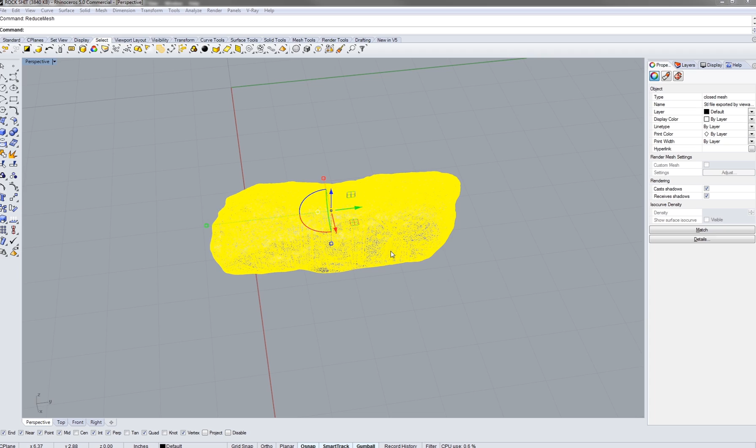Hi everyone. In this tutorial, we're going to learn how to unroll surfaces using our scan rock. You can also do this with the rock that you generated through using the jig at the beginning with the faceted method.

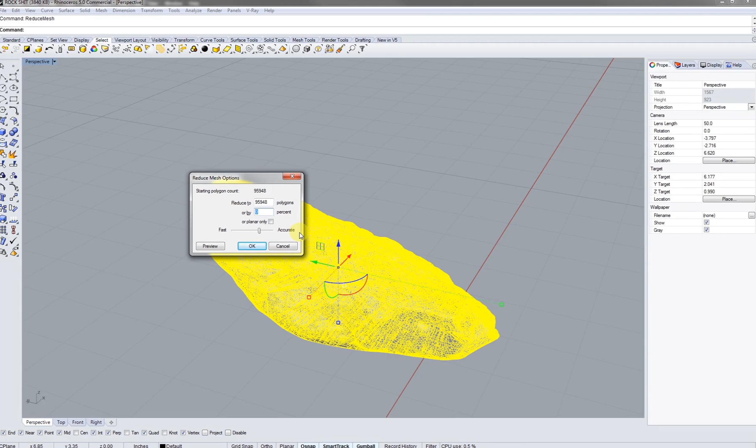But what we can do with our scan rock is literally reduce it using reduce mesh down to the point where we get maybe 100 different faces or a little bit more. So I have about 100,000 faces on here. I'm going to eyeball this a little bit and take it down 75%. We'll see where that takes us.

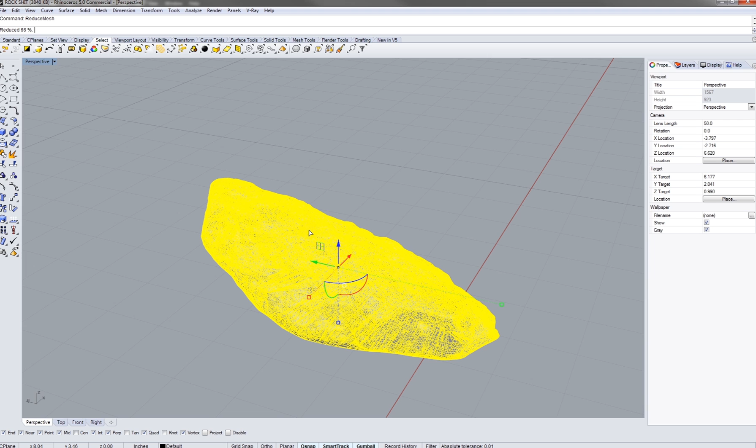Basically we're looking for triangulated meshes, and we don't want any overlaps within this little tutorial. It looks like it's still thinking a little bit. Almost there.

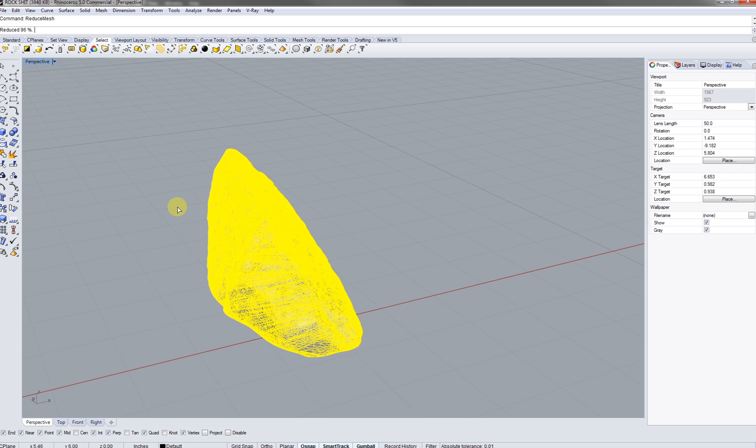There we go. So this is still a lot of faces, so let's do it again. Let's bring up the number. We're at 23,000, so let's bring it up to 90. Otherwise we'll be sitting here all day trying to eyeball it.

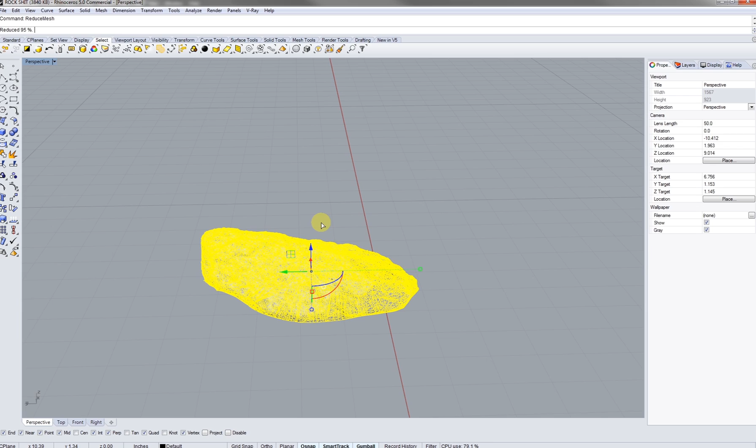There we go. All right, this is still quite a bit of faces, but we're not going to go 90 again. So let's just bring it down 25%, see what that gets us. And we're going to bring it down even more. Let's do 50 again.

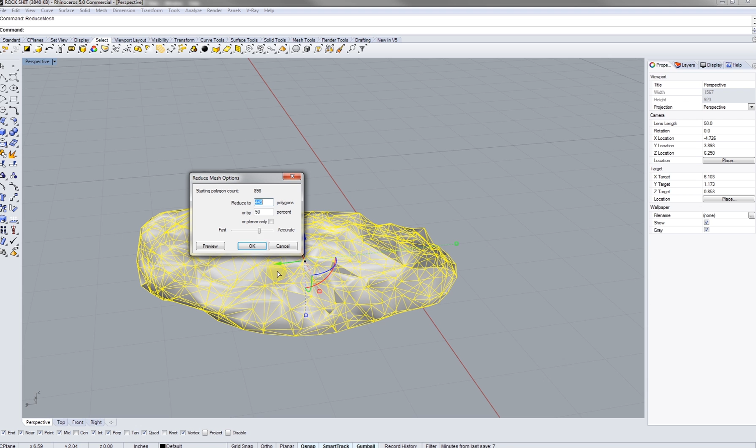We want faces that are about half an inch to maybe an inch long. So these are getting pretty wicked. Let's do it one more time. There we go. This looks pretty good.

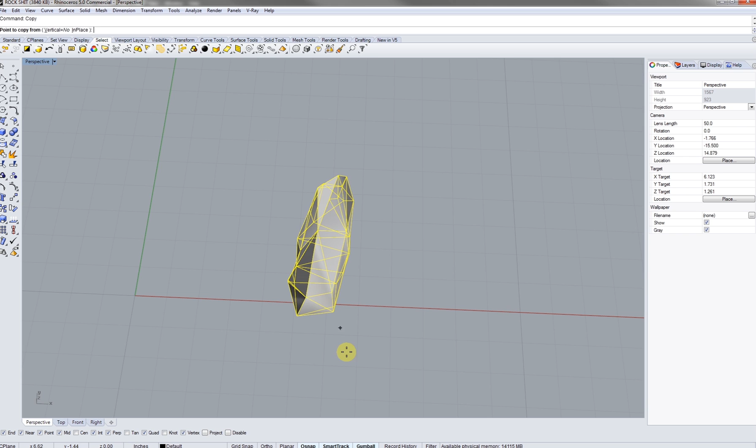So for this exercise, basically we're going to copy this over. Let's just copy, and then let's go back one. And let's paste. Let's try to collect our history here a little bit. You guys should keep basically moving your stuff over as you go.

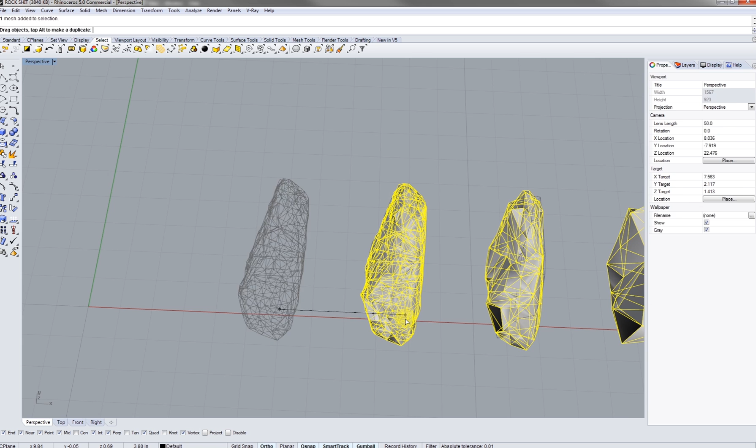That's still a lot, so there we go. We can kind of see a de-resolution pattern through here. So for this one, let's see if we can actually get a little bit better looking rock than this one. I took it down 50 again the last time.

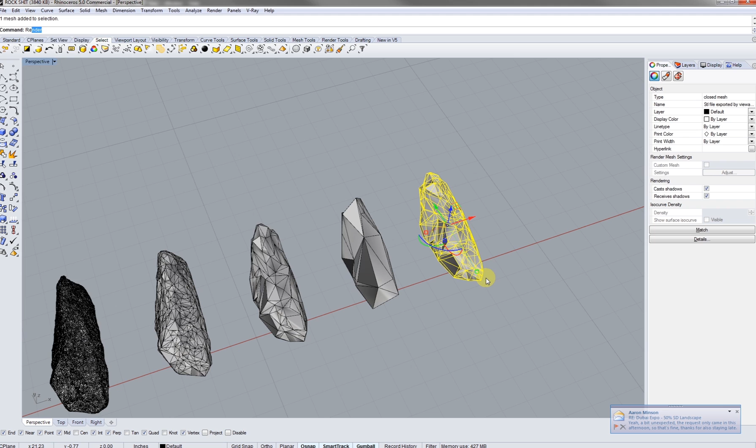So let's bring it down. Let's just do 25 for now and see where that takes us. Do it again. Do it one more time. One more. Okay, that's about the same.

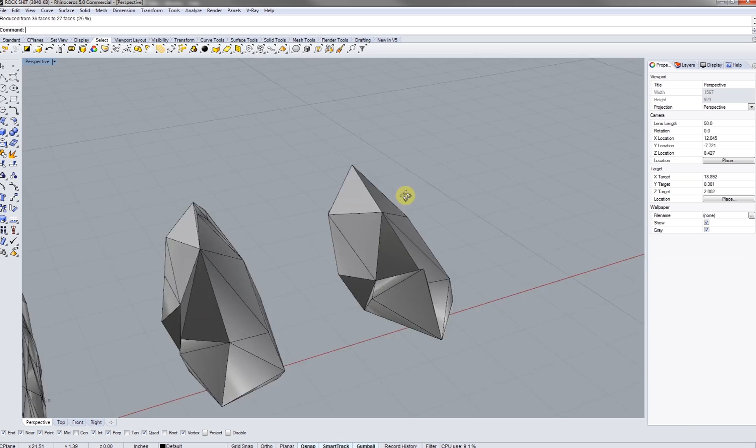Okay, this is looking slightly better. Let's try it one more time. Perfect. So we're going to end up using this rock over this one. It just seems like the faces are actually lining up a little bit better.

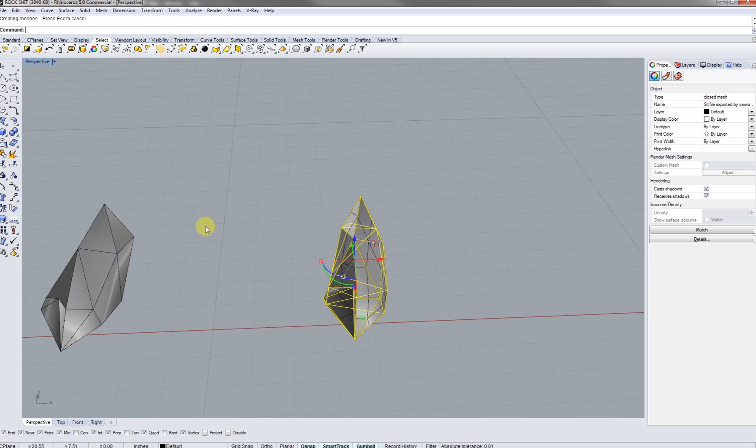So the next step after this is, since we still have a mesh, we're just going to move that rock over, and we're going to right click on our mesh, from surface, and that'll give us polysurface from mesh. Basically from here, we're going to unroll the surface to make cut sheets. So using this, let's just explode it out.

With this technique, you want to select surfaces that kind of run in a line. So if this is similar to a ribbon that's constructing this rock, select them all together and join them. Typically what I'll do is just change the color, just like that.

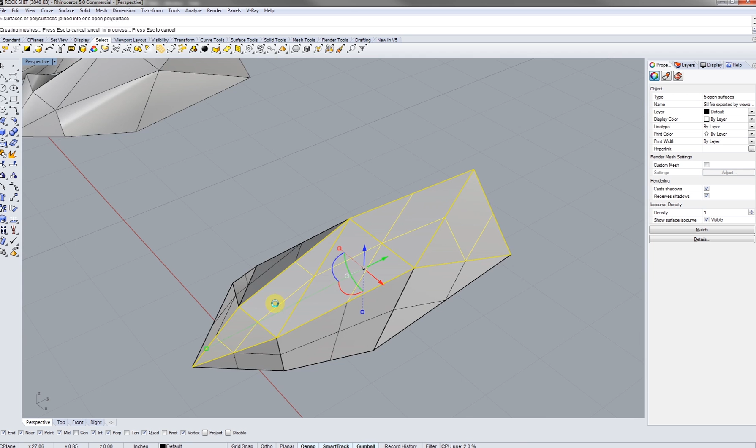So the next one right below it, I'd say that's just perfect for a line, and I'll join those together. Now we might have to change these a little bit later, but for the most part we can try to eyeball how these pieces kind of fit together in these little ribbon segments that form together.

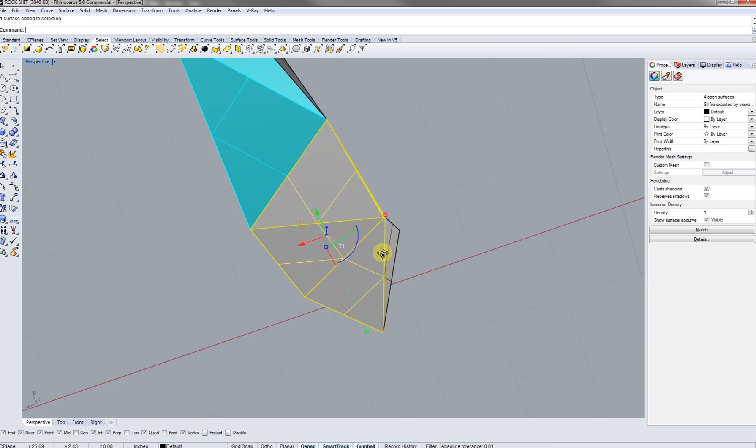This one might be tricky, so let's take off those three. Let's just join these guys. They don't specifically need to be all different colors, it's just as long as you've got them joined.

So this one, since there's that little kink in there, I'm going to just join these to make it simple, and then I can see that these more than likely will work. Let's join those, and then around this bend.

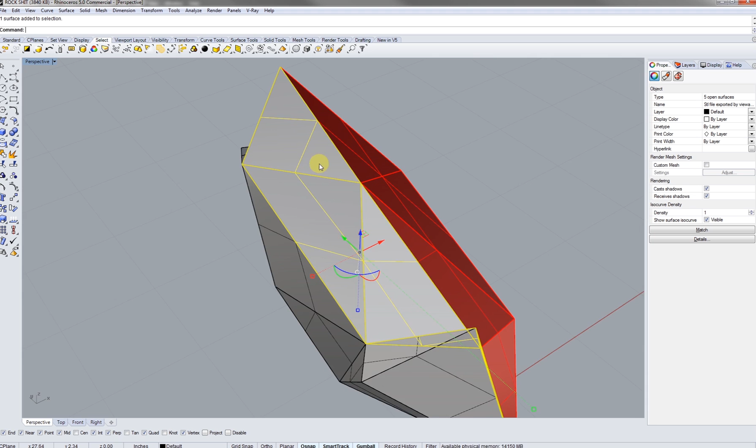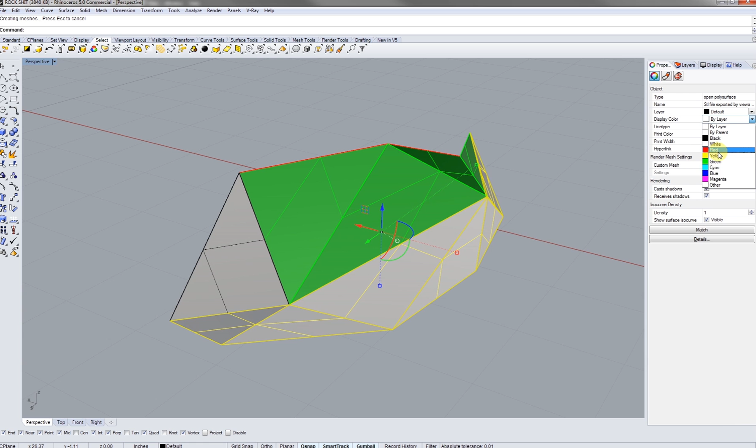You're basically, when you're trying to find these ribbons, you're trying to find continuity within the model. So these ribbons here, or these segments, are helping construct the rock, and these two can go together, just using polysurfaces. So being able to break down the logic behind how these surfaces are created would be a big advancement on fabricating this rock.

So near the end, you should have something similar to this. And I hope we have a couple mistakes so we can see how to redo this a little teeny bit.

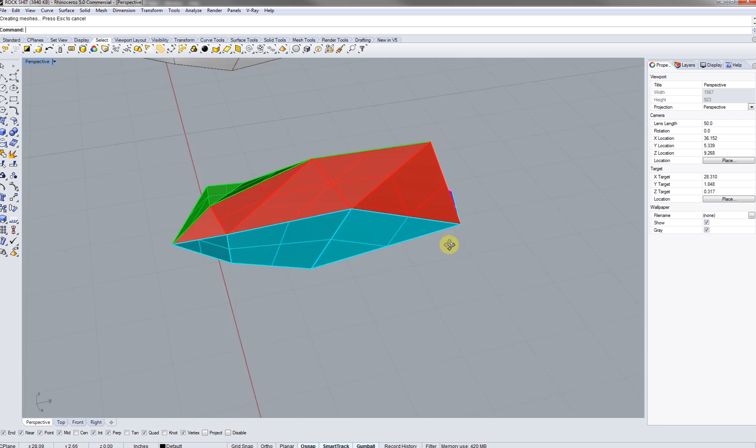So the next command we're going to use is unroll surface. You're going to get some options up here. Basically, what I typically do is explode — I say no, because otherwise it's going to break it up into triangles that you then have to piece together. Labels help keep track of everything, but typically I don't use it.

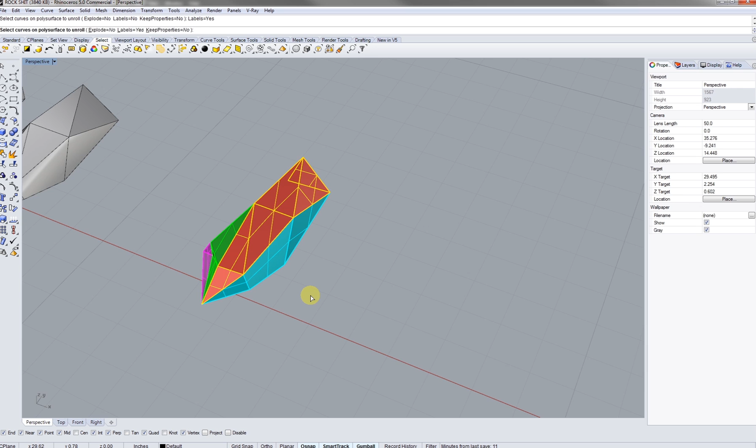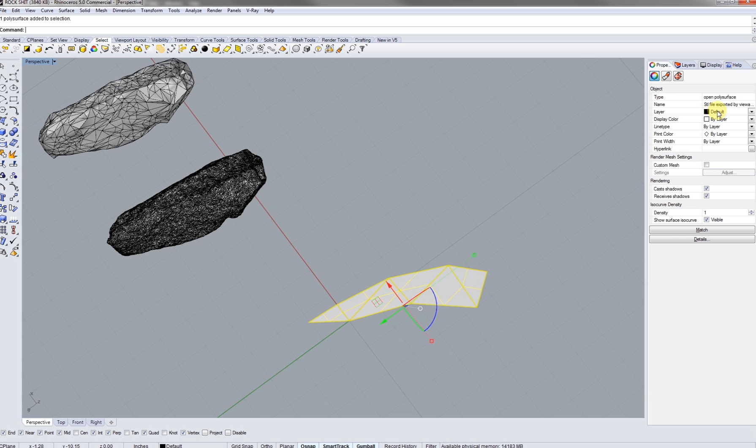It's basically just saying midpoints and intersections, so I'm not going to use that. Let's undo that, and so unroll surface. If you just right click again, basically at your origin at 0,0, what it's going to do — and if we change that color to its original color — it's going to unroll that surface. It looks like the...

So it's going to unroll the surface that we selected into a flat panel that you can then etch and refold together, similar to origami. This is a really neat strategy to create volume really quickly.

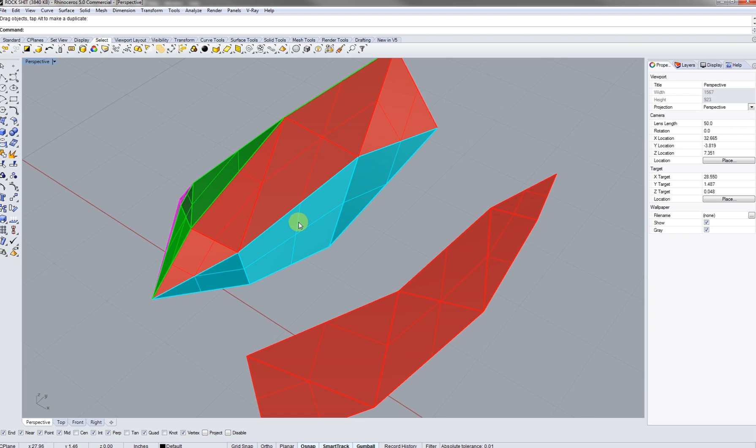I'm just going to lock these two layers for now, and then do unroll again, and I'm hoping for a mistake, and once I see one, I'll point it out. The biggest thing here is try to keep your colors organized to the faces you're creating. So this was the cyan piece. Just lock them down really quickly. This one looks like a really easy one.

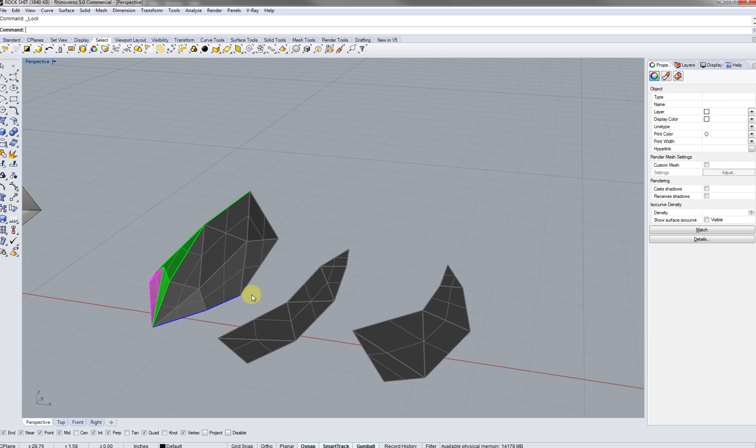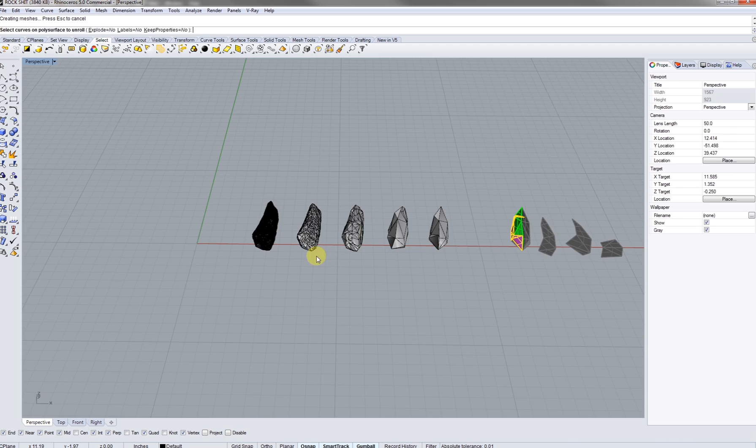That's blue. So we'll just run through this relatively quickly. You want to make sure not to separate this rock out, by the way, because it's going to be your mapping device for putting this piece together. Okay, and that was magenta. All right, our last one is green. I'm not going to lock that one down because we know where it's at already.

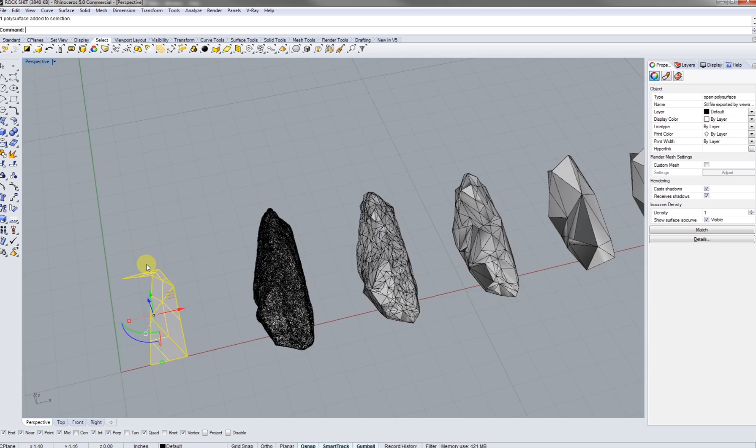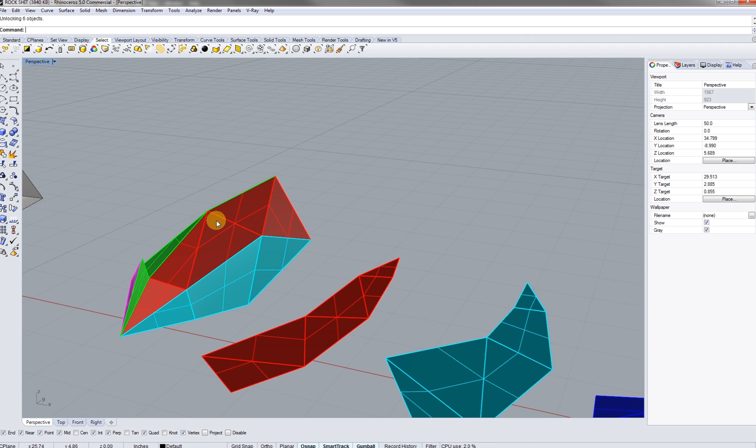There we go, perfect. So what Rhino gives us automatically is these fabrication pieces that you can fold together and line up one to another. If you had labels on here, you could figure out the points that go together. Basically if you look at these, and have them etched, you can piece them together and fold them back into place. A good technique for assembling them is glue on the back side, the inside of the model, and it'll all hold together really nicely.

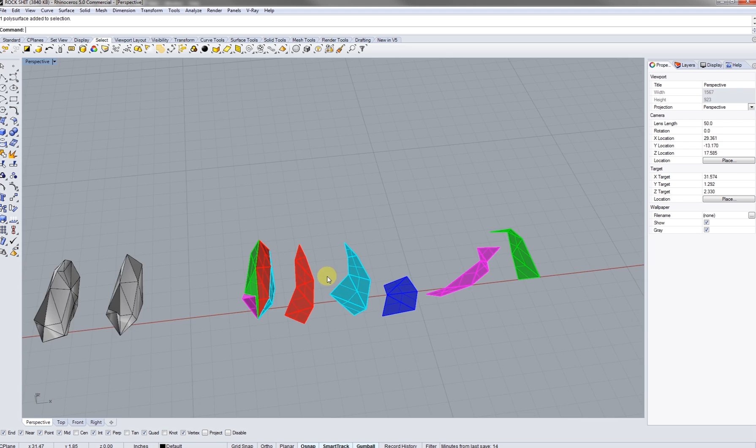So these pieces actually ended up working out really well. There's no overlaps in here, and by overlaps I mean pieces that once you unroll them, they're overlapping on top of the next one. So let's try to replicate an error that probably will happen with one or two of you. If I join this complex polysurface together, I know for a fact I'll have an error. So let's unroll this.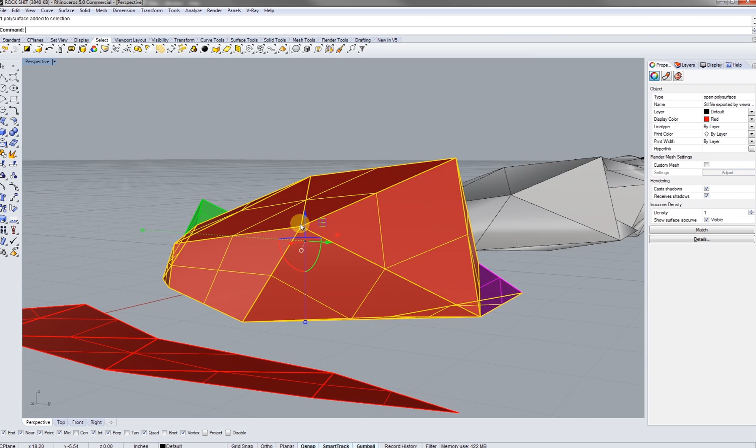Do it again. Wow, it's not even that piece. You could use those two pieces together. Let's try that one more time using this piece. Let's unroll. So if you guys find different variations like I just did...

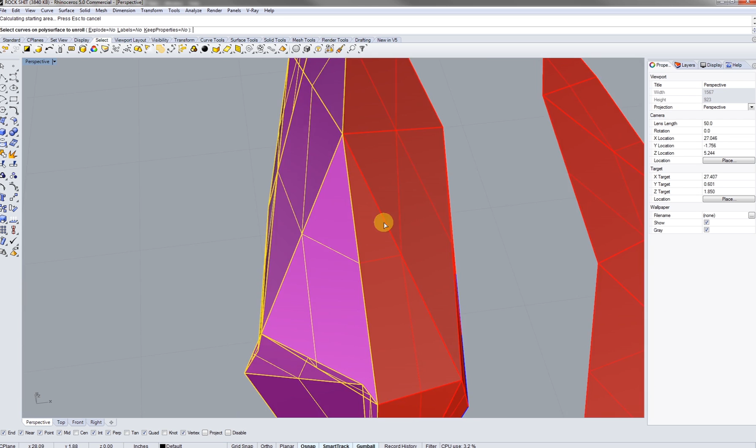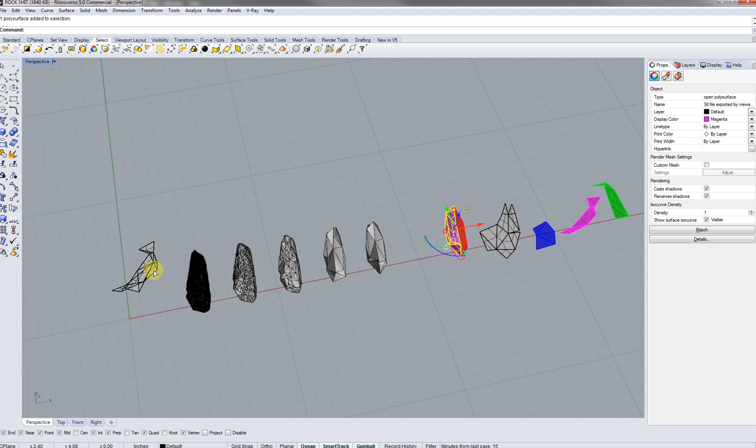We could take away basically both of these pieces since this unrolled correctly. By unrolled correctly, there's no overlaps where there shouldn't be. Whereas the piece that we just knew would make a mistake, this magenta piece, if we pull it over here, you see a lot of overlaps from surface to surface. See all those lines that continuously hit on the next one? Those won't fold together because you're going to laser cut on top of them, and it's obviously not going to work as single panels.

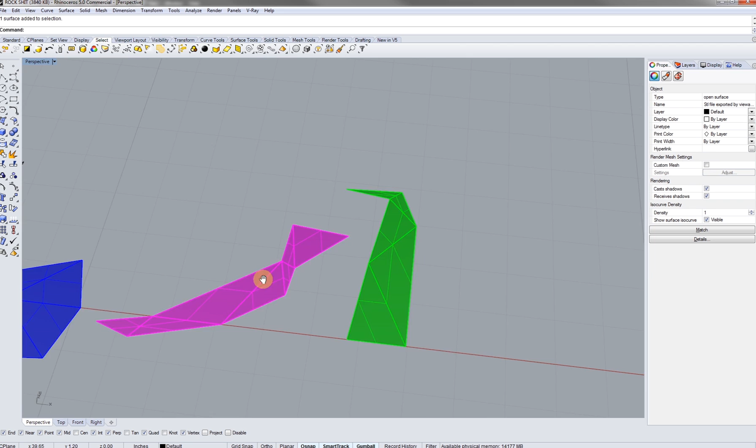But when we look at this one, or any of these for that matter, you can see there's no overlaps and everything's open, and you also get reference points of how these are going to fit together nicely. So that's a big benefit there.

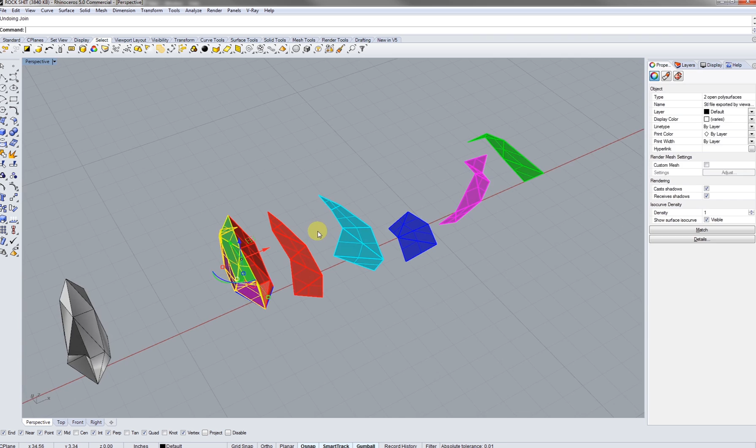So I'm going to copy these real quick and hit undo a couple times, and delete these guys out. Delete that, and paste. Let's just change that to red really quickly.

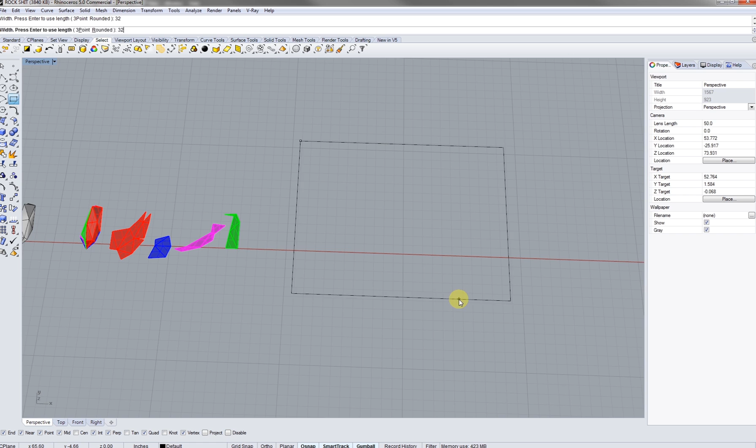For laser cutting, I'm going to show you an example of how you should set this up. Let's make a cut sheet here, 22 by 32. I'm going to rotate it to make it a little easier. Basically, I'm just going to copy these pieces over. Notice your cut sheets are quite a bit smaller.

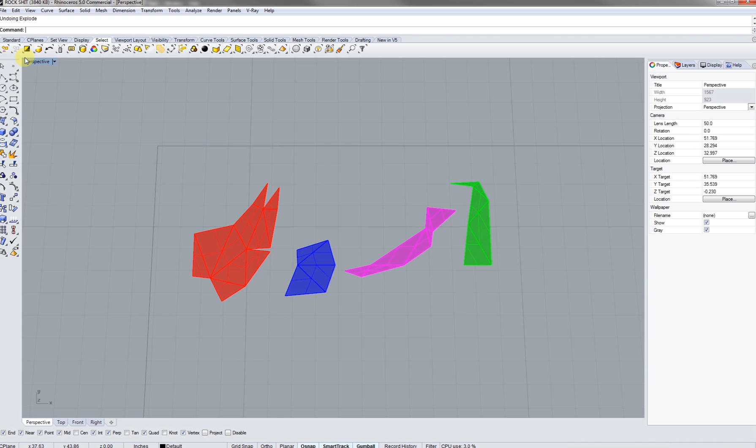So basically, what I'm going to do is just explode them all out. Or another thing we could do is, instead of exploding, actually just do a Make2D. You should be getting your outlines, which is great. So those are going to be your cut marks, because it's strictly the outlines.

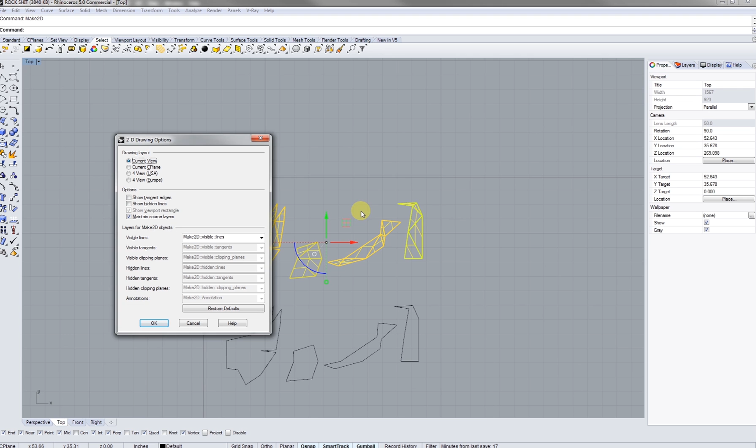Now what we're going to do next is unroll them, Make2D again. Hit enter, of course. Basically, these are going to be our etch marks. So you want to make sure you keep those on a separate layer. For now, I'm just going to make them yellow.

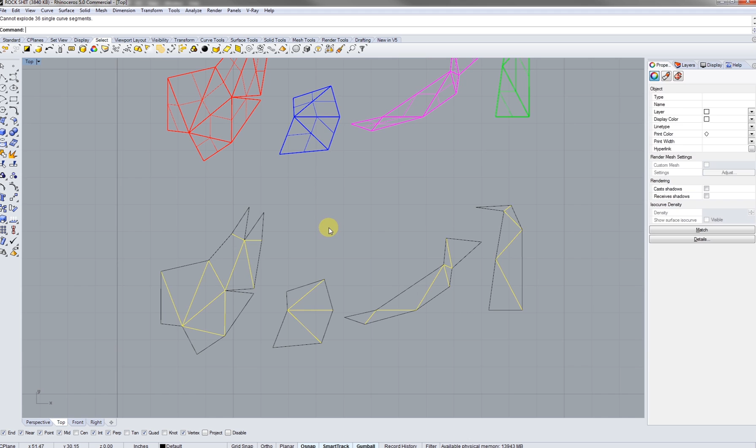Since our outlines are right here, I'm just going to select all those—you might want to keep them grouped. I'm going to explode them out, and basically we can delete our poly surfaces, and let's bring this to the front.

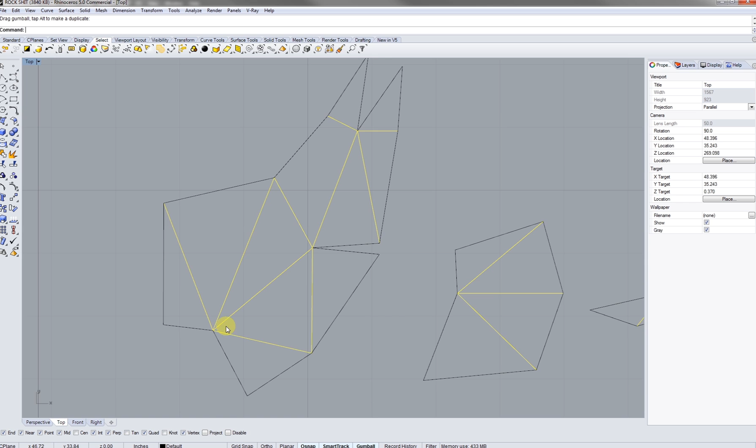So basically what I just set up here is the black line would be our cut, and then you'd use less than half that for etching, so you can get nice clean folds. If you're cutting with a knife or shears, you would then just crease or etch with a knife.

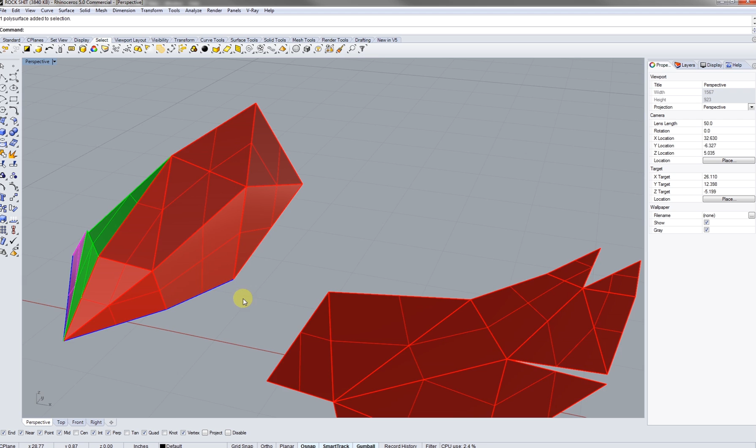After you're done with that, you're going to take your pieces and strictly follow along with your Rhino model that you previously created, and try to clearly mark out where pieces go. I know I can see these two small triangles correlate with those, so I'm going to line up and try to match how that rock here is put together to my physical one.

So I hope this helps. It's one of the easiest techniques to master. Just make sure your glue seams are clean, and you'll have a beautiful looking model.